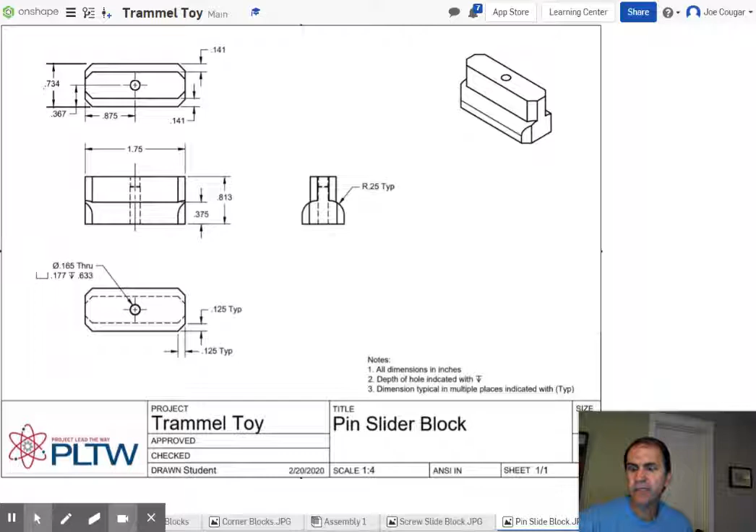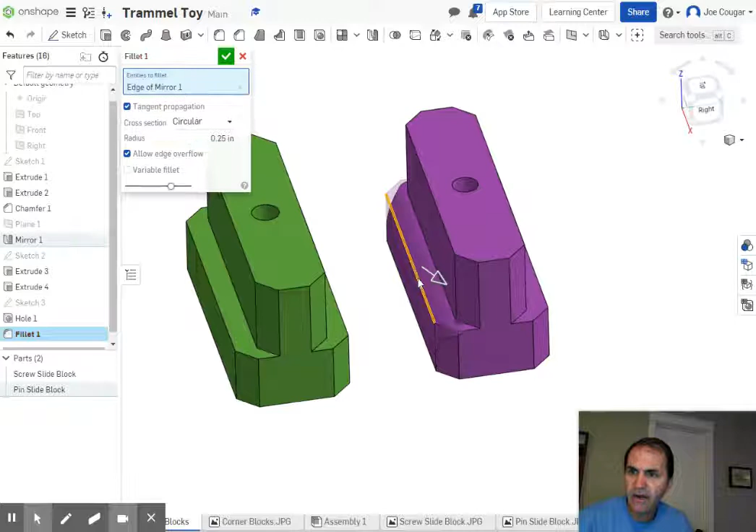So can we please go to your slide blocks and let's fix that right now. You don't need to put a picture of it because I'll trust that you're just going to do that. So we're going to click on fillet, make our fillet 0.25, and we're just going to click on this edge. And to be careful, it's not a surface, it's that edge right there.

And the same thing on the other side, that edge right there. Done. All right, and we're done. We've got it good to go. So, oops, but we fixed it pretty quick. And now we're ready to move on with the corner blocks. So the corner blocks are going to be these four pieces right here. The slide blocks slide through them, and then we will deal with these pins and this little handle and all that stuff later on. All right, so let's get started.

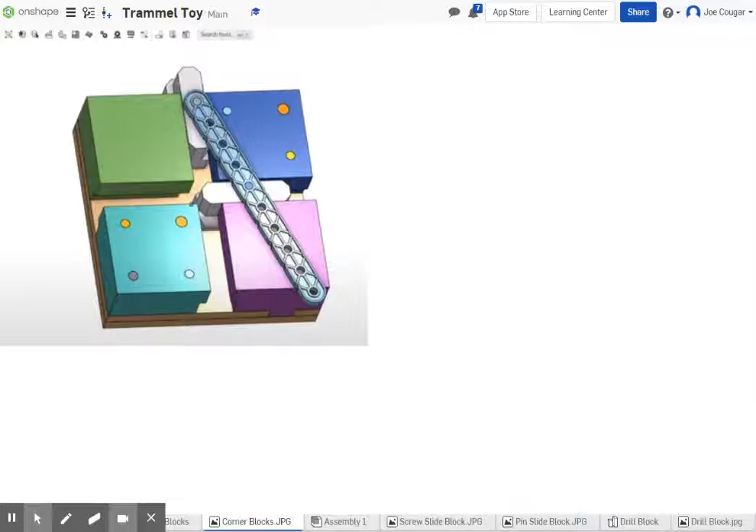We need to begin by creating a new part studio. So let's do that. Create part studio. And where it's named, let's rename that tab and call it corner blocks. And while we're at it, I never named the first one, that is the base plate. Let's go to that one and rename it as base. I think that would be good enough.

I try and keep short names to kind of keep these things where I can see them. So let's go ahead and get started with this. Now, this is going to be a little tricky because rather than draw all sorts of crazy stuff all over again, remember, I want you to do this in the laziest possible way, right? Bill Gates said at one point, when I want to get something done fast, I find the laziest person I can that has those skills, and they'll find the easiest way to do it. So we're going to be lazy.

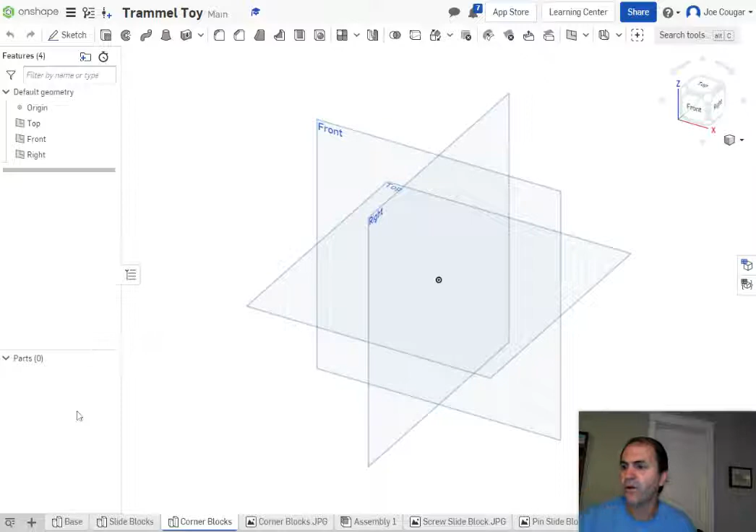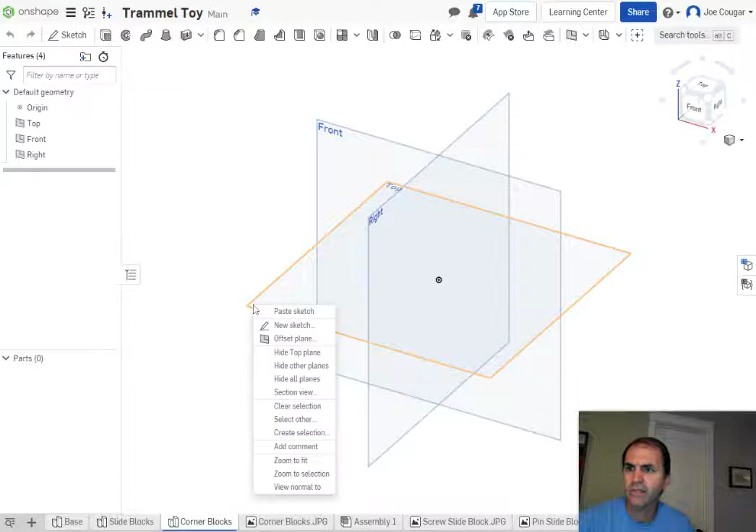So go back to your base, and we're going to go back to sketch 1. That's where we did all those holes and all that sort of stuff. Right click, we're going to copy that sketch. Okay, now we're going to go back into our corner blocks that we just started. We're going to right click on the top view, make a new sketch. I like to turn off the planes by hitting P, and of course we're going to set to view normal. And now we're going to right click and paste sketch entities. Boom, okay, there we go.

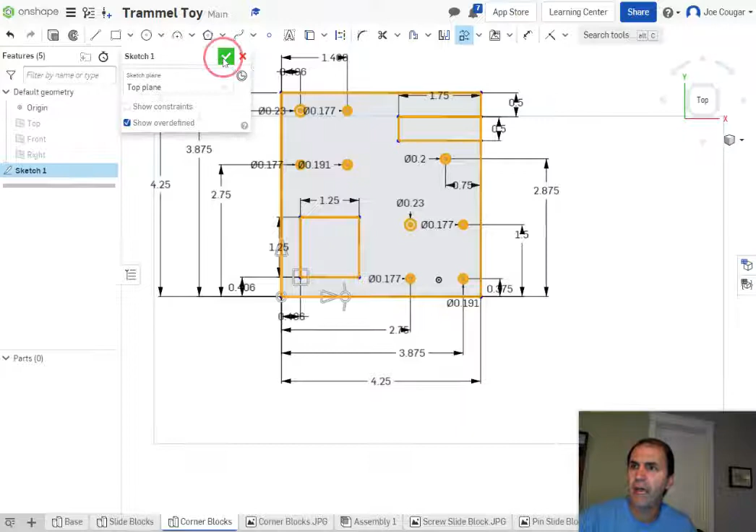All right, now we've got all that stuff that we can use, and we're going to say okay. Now, this is not, the origin point is here, which is a little weird, but that's okay. In fact, I'm going to just turn that off for now. Now, I'm going to go ahead and click on the top view to get this close to me.

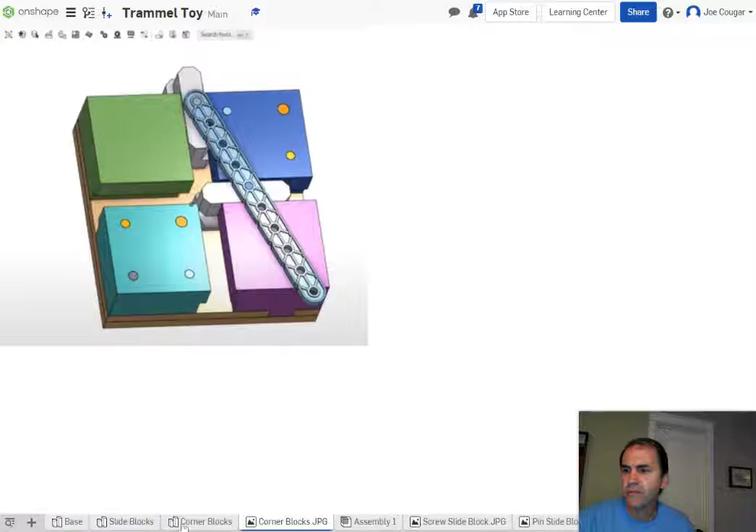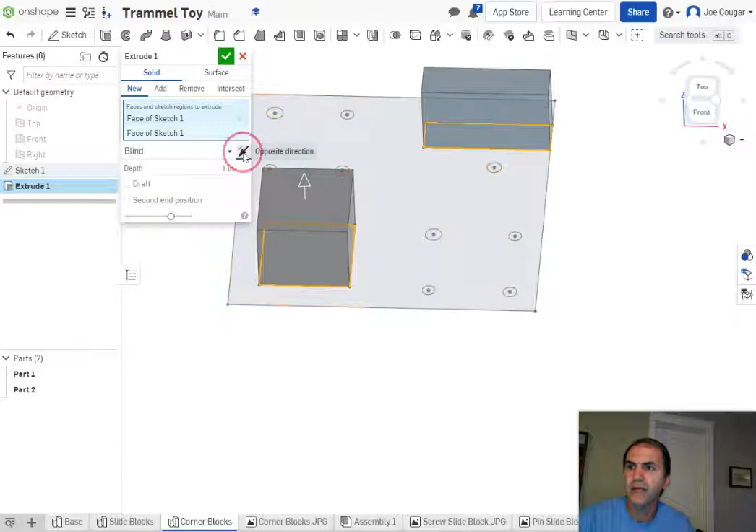Now, we're going to make the undersides, which are down here, these little notches down here. So we're going to start by building up from that, and we need to get some measurements. So here we go. Now, first things first is I am going to extrude these two shapes. They're going to have a part that sticks down into that base, into those slots for 1/4 inch. So we're going to extrude that one and that one, but I'm going to go the opposite direction. Okay, now it's going to make two parts, and that's okay. But we're going to go 1/4 inch, 0.25.

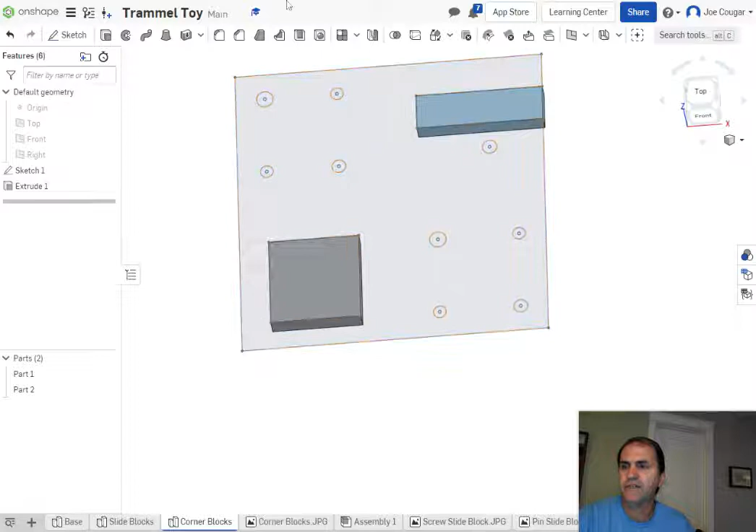Good, so we've got those. Now, sketch got consumed because the program does that for you. It assumes you don't want to use it anymore, but I do. So let's turn back on sketch 1. Okay, all right, so cool. So now we are going to start with a new sketch on this surface. So let's go right here on this and new sketch.

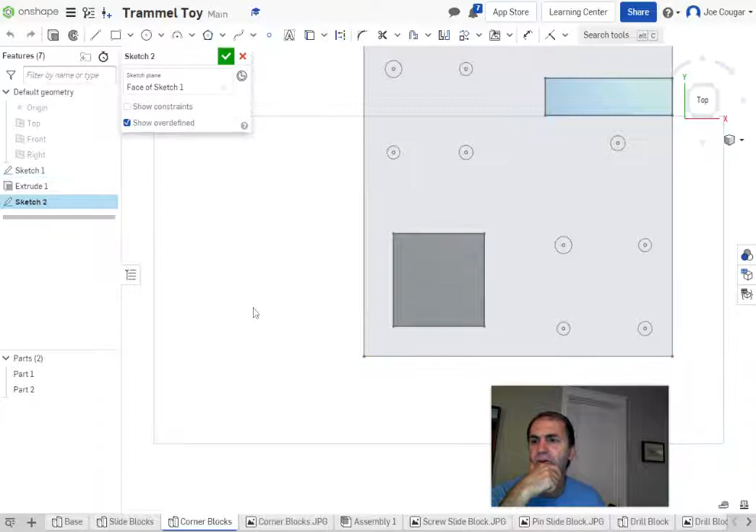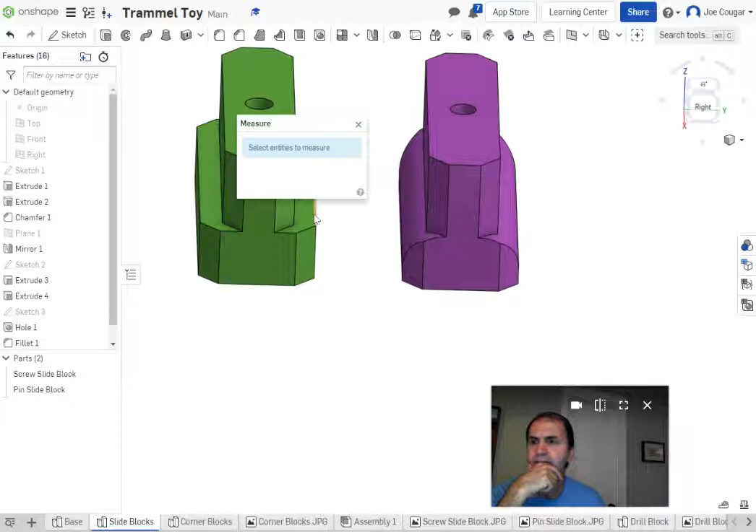Okay, and for normal. Now, we have to make, this whole thing is 4.25 across. So believe, let's measure that to make sure. Measure this line right here, 4.25. All right, so we're going to do some math here and figure out on the slide blocks, the part that fits into there and is going to be from here to here, right? So let's measure that from here to here across. And that distance is 0.734. All right.

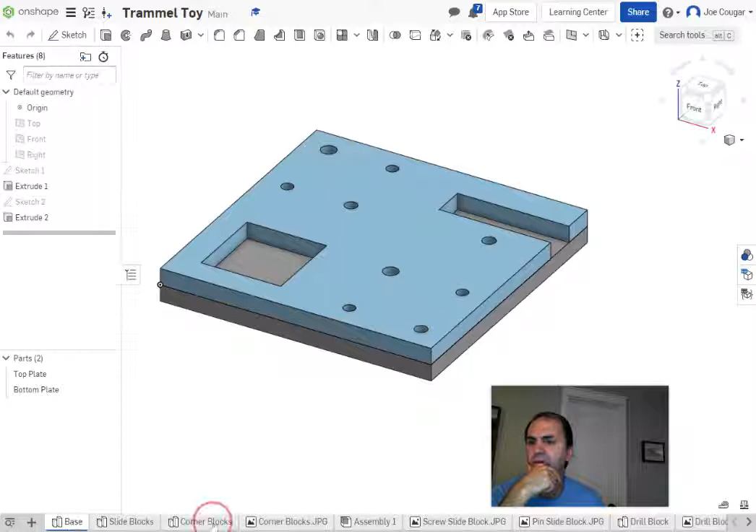So let's go back to our corner blocks. I'm going to draw a rectangle, but I want it to be a little bit smaller than that, to have some clearance. So I am going to make that rectangle that's going to be extruded actually smaller than I need, so that slide block has some space.

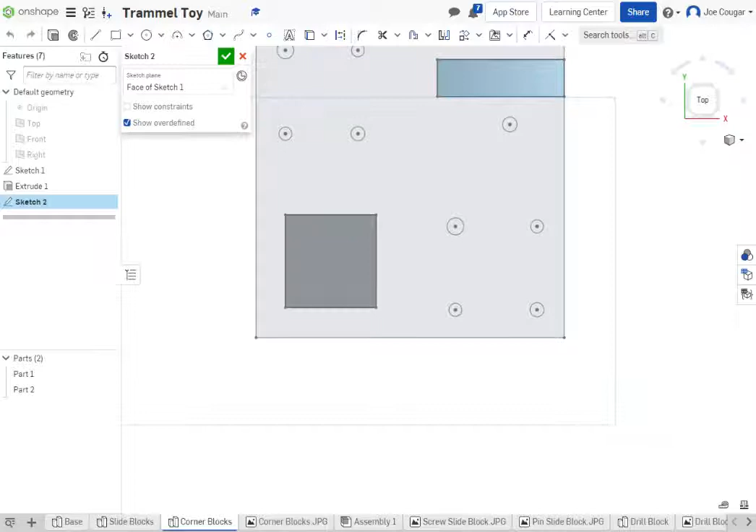So in order to give some clearance, we are going to draw a rectangle down here from this corner upward. Now I'm just going to click. I'm not going to enter any values yet. Actually, I am going to enter values, but I could go and dimension that if I need to.

So this first dimension, whoops, I accidentally clicked off it. So I'll go dimension here from this corner to this corner. That dimension, the whole thing was 4.25. But I'm going to subtract out 3/4 of an inch because that little slide block was almost 3/4 of an inch, so we're going to do a little more than that to leave some clearance. So we're going to do minus 0.75.

But we're going to take that whole thing. You have to do order of operations, folks, it matters. And we're going to divide it by 2. Enter. Okay, and it ends up being 1.75.

So it's going to be square, so we'll dimension on the other side to that 1.75.

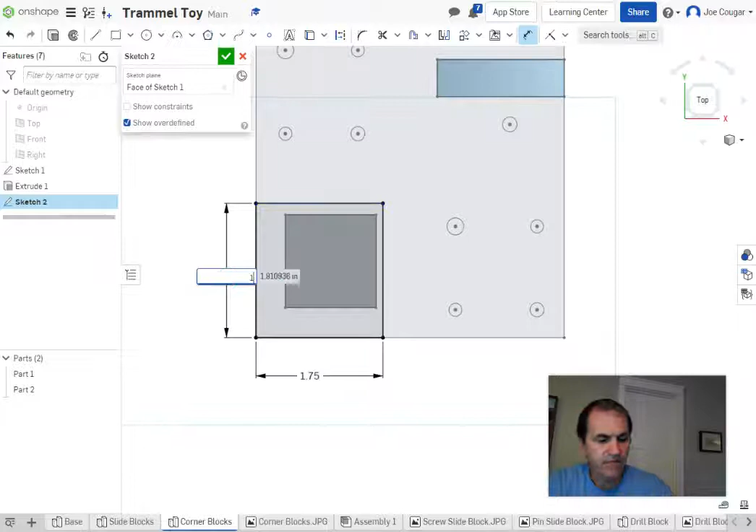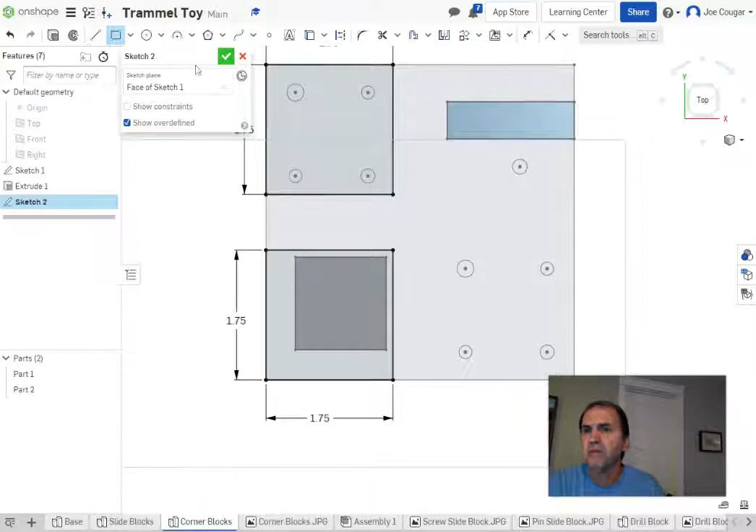And then let's make all other rectangles. I'm going to show you a little trick here. So I'm going to do this 1.75, not 175, that would not be good. 1.75. Now, little trick, you could do that same exact thing again, or you can draw your next two rectangles like this.

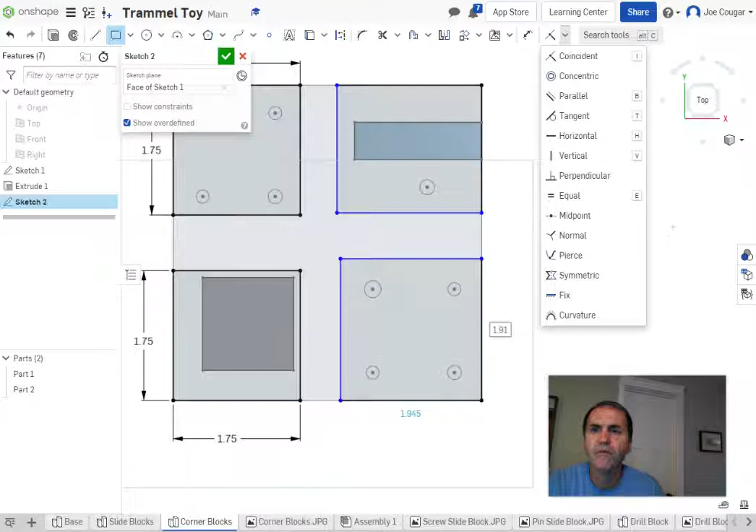Well, we'd still have to dimension. I was going to say we can do a linear... where's my linear? Oh, I'm thinking of another program. Well, we could do horizontal constraint between this and that, and then it will make it the right size. I'm just going to dimension just to make it easier on myself.

So let's do this as 1.75. Now it might not let me do the other one because I have it restricted. 1.75, enter. Yeah, see how it's gray? That means that it's a driven dimension. I've already dimensioned over here, so I'm just going to delete this.

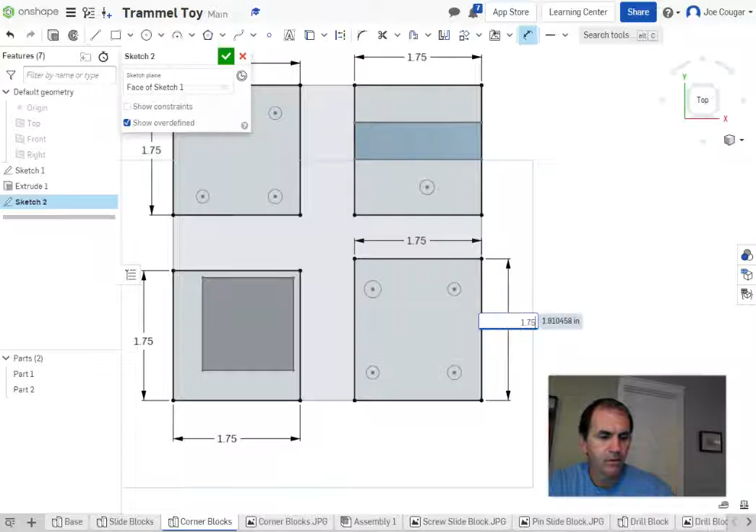If you didn't do it this way, you have to make sure it's all black, right? So, 1.75. And finally this way. All right, we are good to go with our 1.75 rectangles.

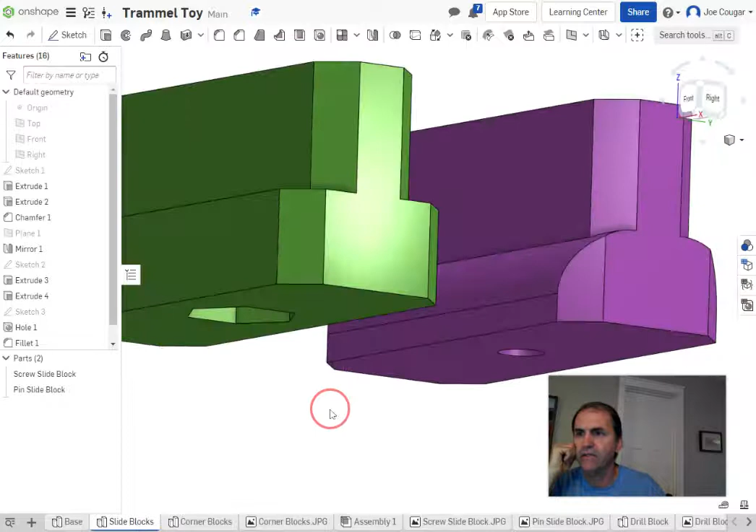Now, we are going to extrude those upward, but again, we want a little bit of clearance. So let's go back, I'm going to go ahead and finish this sketch. And we're going to go back to looking at our slide blocks, and let's see what this distance is going up. Okay, so we're going to measure from here to up here and see what that is.

0.355. So we're going to make our distance 0.4 and give it a little bit of clearance to move around in. If we were 3D printing these, we would have to have some clearance to make sure that there's adjustability for the tolerance of those materials.

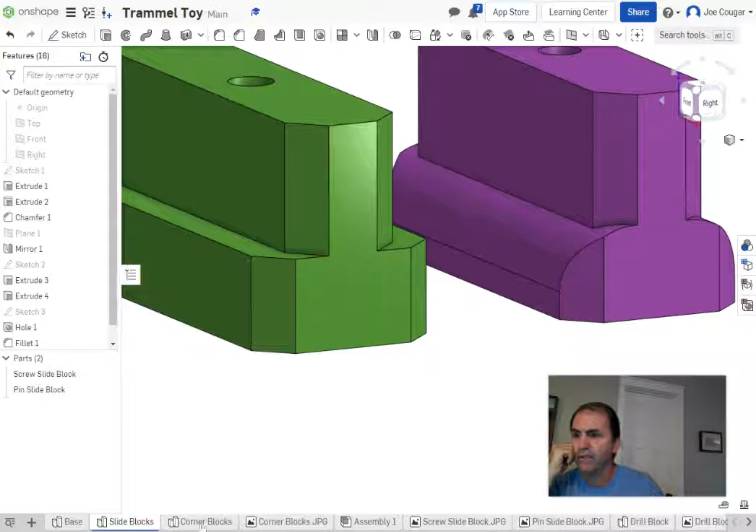All right, so let's go back up here, and we are going to extrude. Now I'm going to show you a little trick. If you try and extrude and come in here, there's all this different stuff, but we can extrude a sketch.

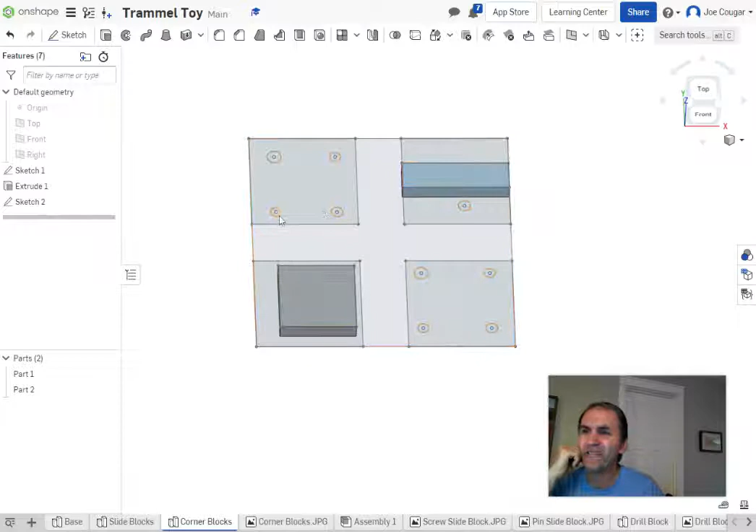Now, I messed up, so which means you messed up. So let's go back, and I kind of forgot in sketch 2, we got to deal with these little holes because those holes are going to go through there. So let's go edit this sketch that has those rectangles we just made.

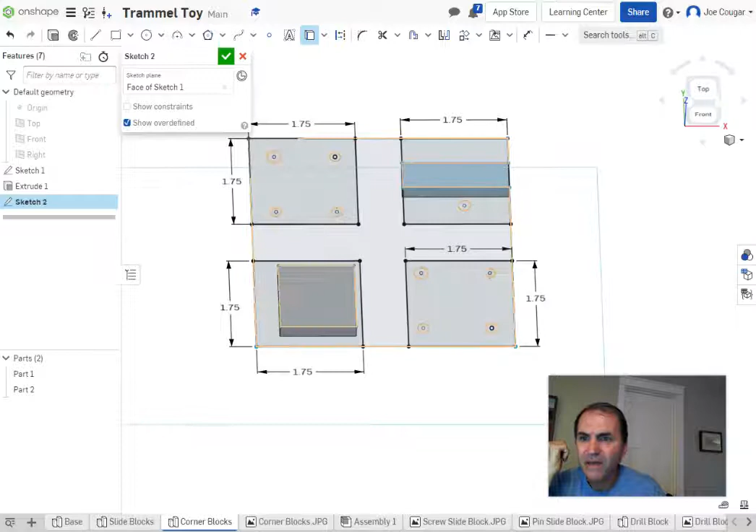And we need to use these circles that are on here. That one, that one, that one, that one, that one, that one, that one, and oops, I didn't get the circle, I got the center point. Make sure you get the circle and its center point, not just the center point. So see that one up there that's gray? Yeah, make sure you look at that.

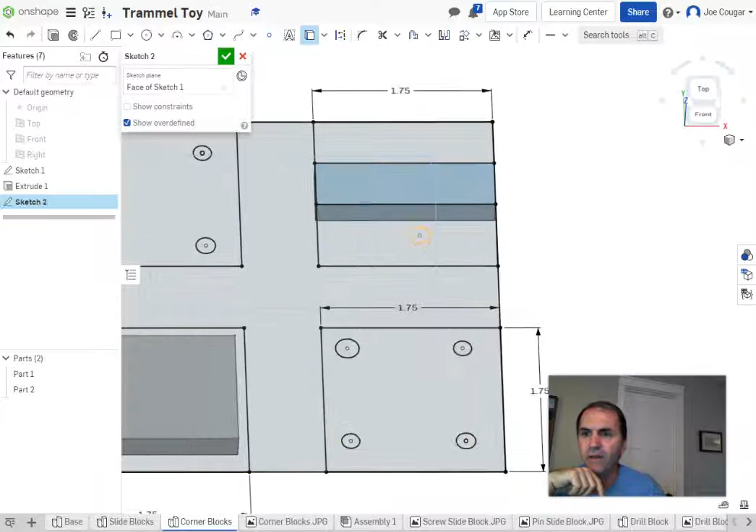There we go, to get the circle. Okay, now on this one, this little one that's by itself, if you already clicked on the circle, it's no big deal. But I just want the center point on that one. Click. Now here's why. I am going to make a new circle on here that's slightly smaller than that one.

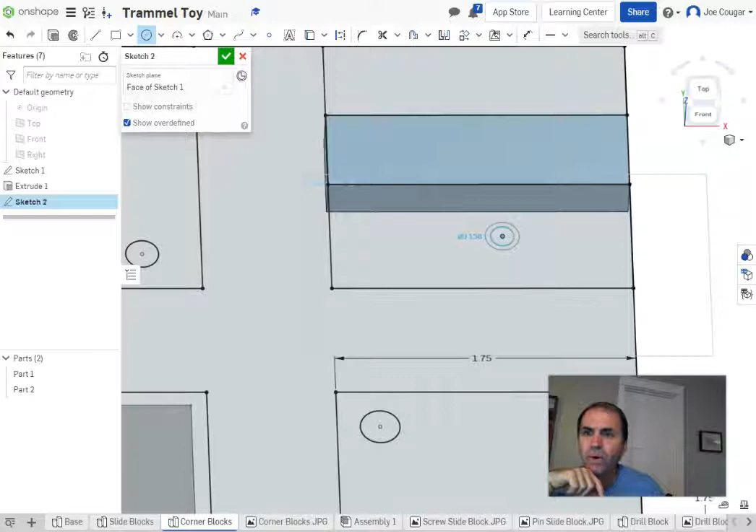Circle. I'm kind of going to guess at the dimension. Let's make it a 0.125. That's 1/8 of an inch. Click. 0.125 circle. Now, if you already have this one as black, it's fine, but we're going to have to just be careful when we extrude that as to what we're choosing to extrude. All right, so we're good with that.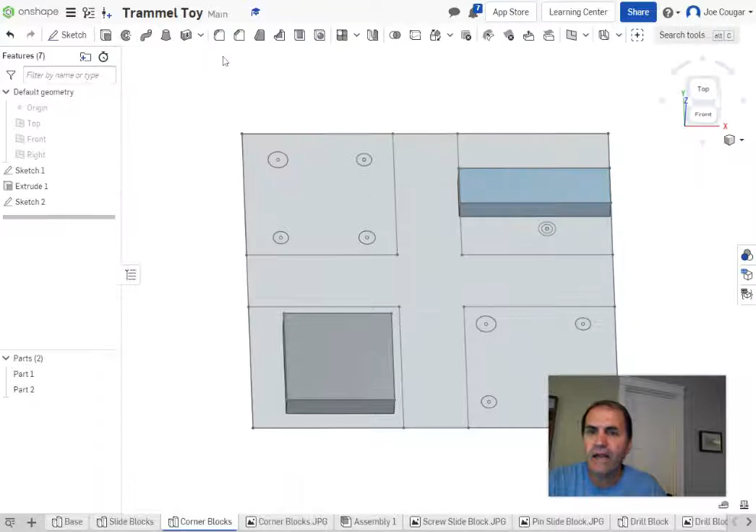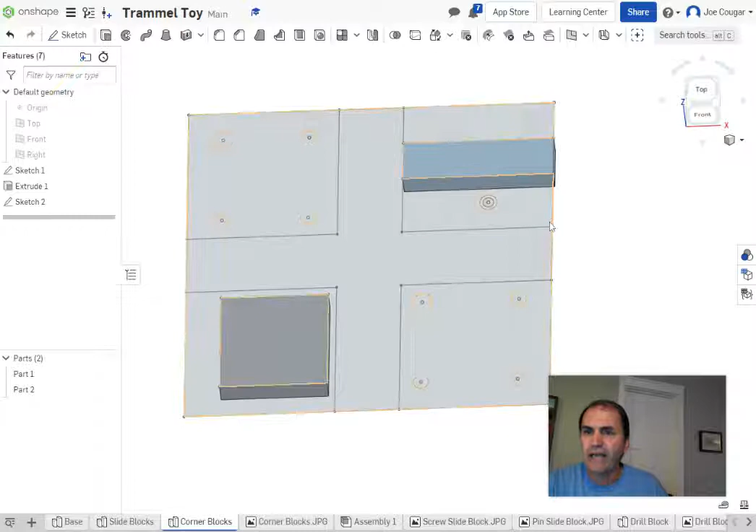All right, now we are going to extrude. And what we're going to do is, instead of trying to pick on things, just click Sketch 2. Okay, and it should extrude. Well, no, it's not working. It's wanting to grab everything. All right. Thought I was going to be tricky. Okay, so we're going to have to be careful with what we're doing here.

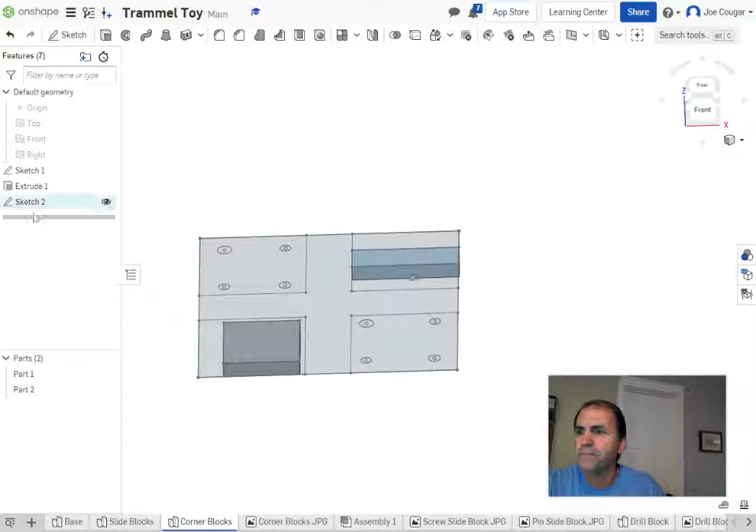So we're going to extrude. I'm going to choose that area, this area, and oh boy, it's not wanting to do that. I might have to do several extrudes. Let's try and see if I can. Maybe, oh, I know what's happening. I need to turn off Sketch 1. All right, now I should be able to do it. All right, extrude. And let's go to choose Sketch 2. No, it still wants to choose those things inside.

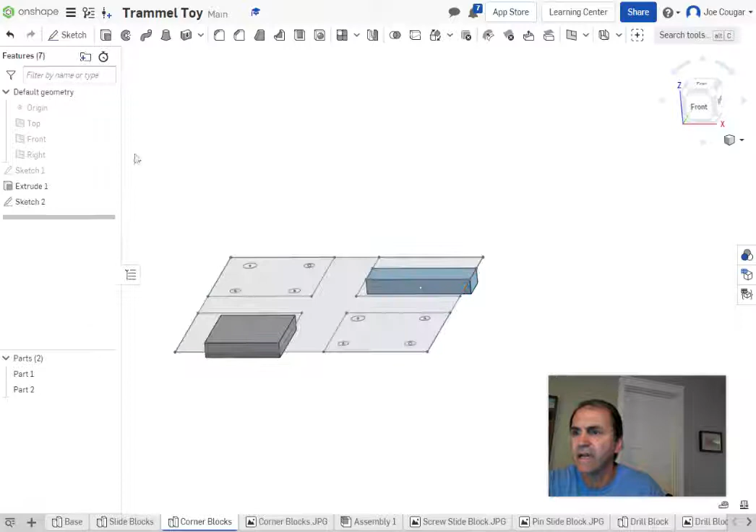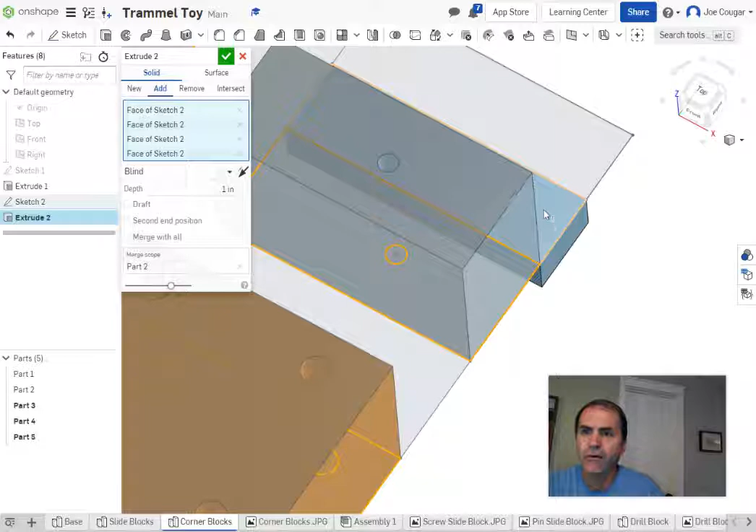Let's try that again. I'm going to choose this area. Again, I might have to do more than one. This area and that area. This area. And then be careful with this one. If you already did this, we're going to choose around that little circle that I made. This. If you have a bigger circle, that's okay. Let's not even worry about that for right now. And we're going to go to a distance of 0.4.

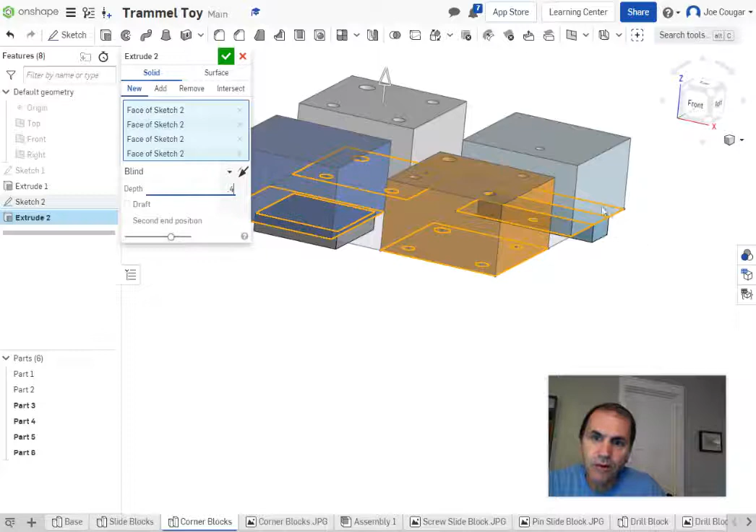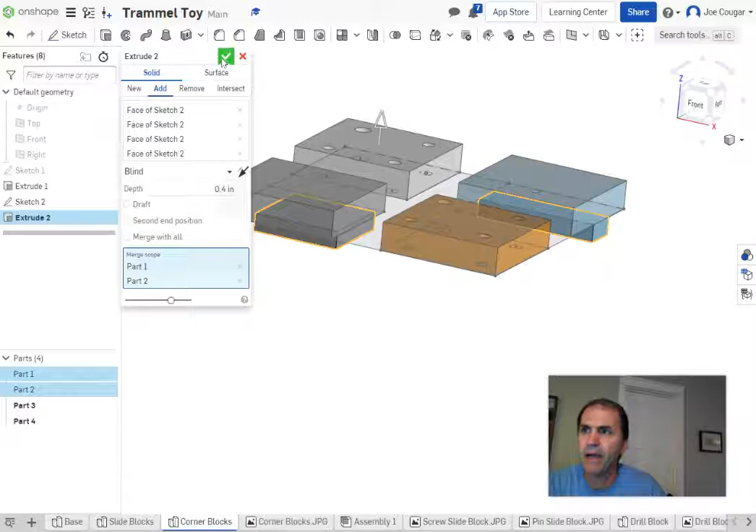Now, it's going to make separate parts because none of these are connected to each other. But we want this piece down here and this piece to be joined together in this piece. So we are going to choose Add. Now, the merge scope is going to be with these two parts, and that should work. Okay. If it doesn't work for you, just watch again. I'm going to go through this one more time, or you can go back and rewind the video to watch that again and just be careful with what's going on.

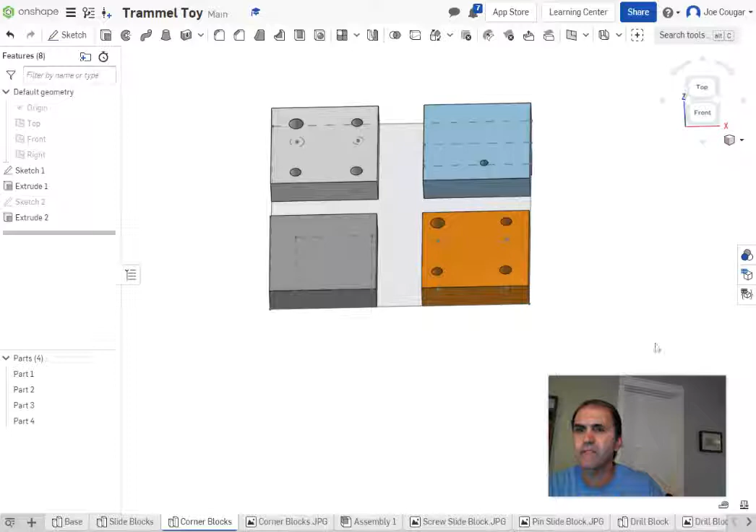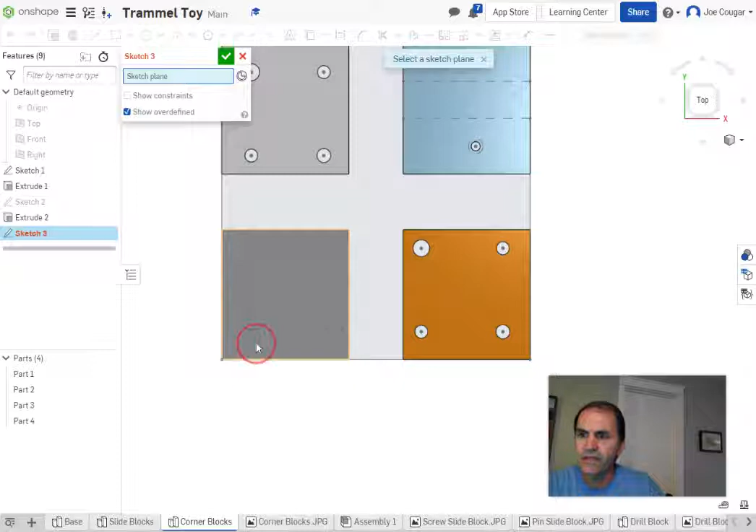All right, cool. So we have our 4 corner block parts for the bottom. Now I'm going to go back in, turn on Sketch 1, because I need to be able to see that. I'll look down at the top, and now I'm going to build up this little corner piece, this little part that sticks out, that kind of holds the whole thing down. So we're going to build that one next. So we're going to sketch on this surface, will be just fine, and we're going to make those 4 rectangles kind of like what we made before.

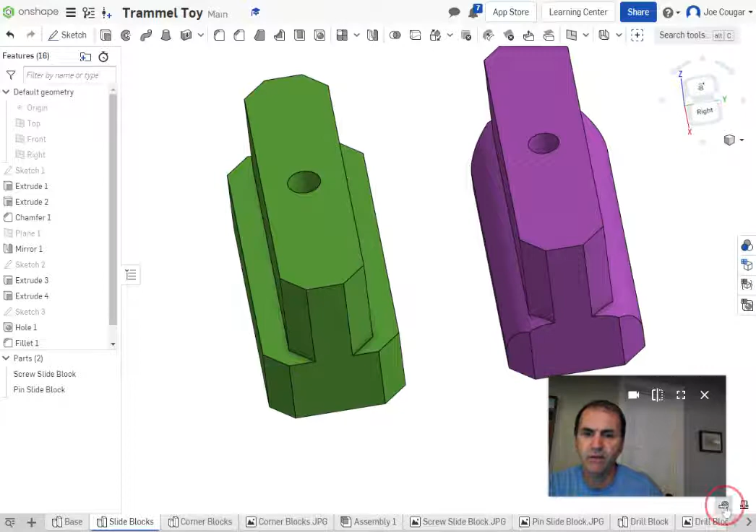So let's click down here, go up here. We're going to do another little bit of measuring to see how far in we want to go. So on the slide blocks, we want to know what is the distance across here. And again, we're going to subtract more than that out to give a little bit of clearance. So let's measure from there to there is 0.452. So if we go 0.5, we'll give that a little bit of clearance. So let's do that. All right.

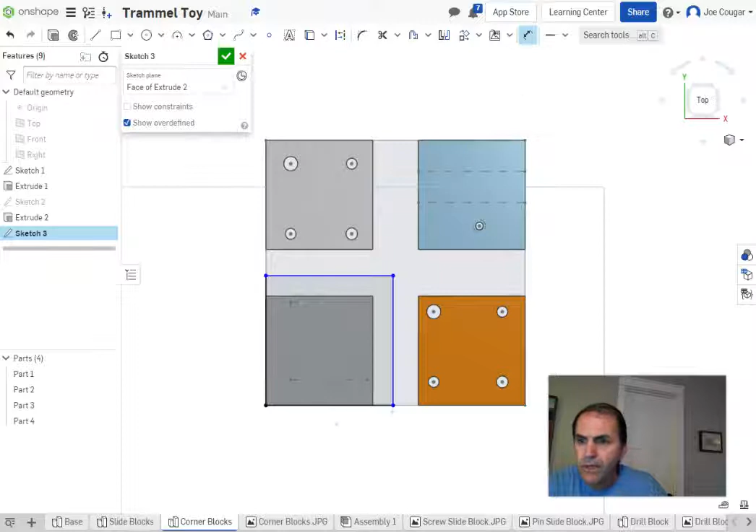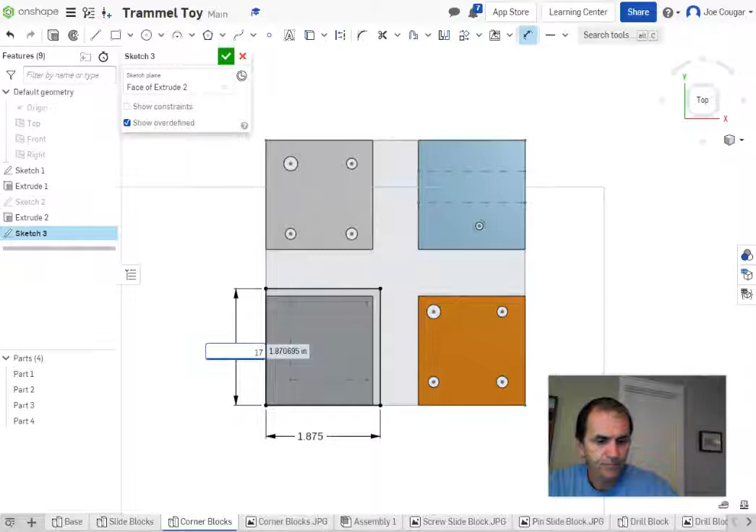So this time, my dimension from here to here is going to be (4.25 minus 0.5) divided by 2. Okay, good. And it ends up being 1.875, which is 1 7/8. So let's go ahead and do the other one. Whoops, I made 0.18. Let's do 1.875. That's better. All right, and make your 4 other rectangles starting from the outside corners with those same dimensions. And once you've got those, we're ready to go with the next thing.

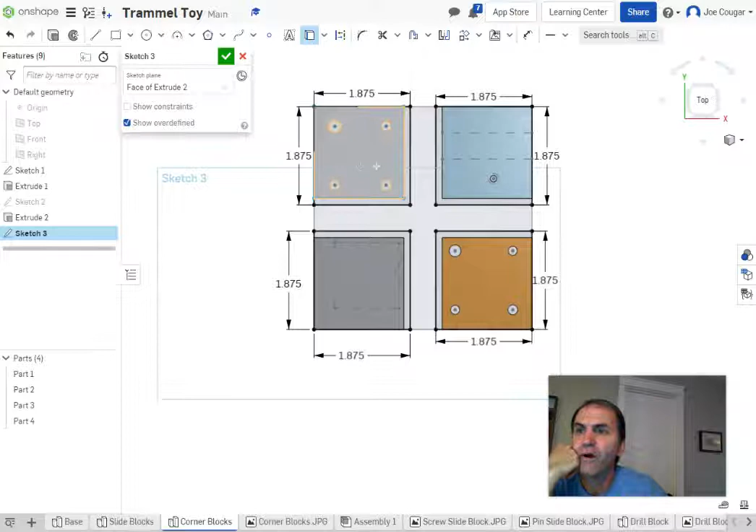Now, these holes on just these two, not this one, go through the whole thing. This one will not be projected, but we need to use project again, and we're going to click on just these circles. Now, I was going to click there, but that'll give me these edges that I don't want. So I'm going to click on these circles. Again, make sure you're clicking on the circle and not just the center point. And then the same thing down here.

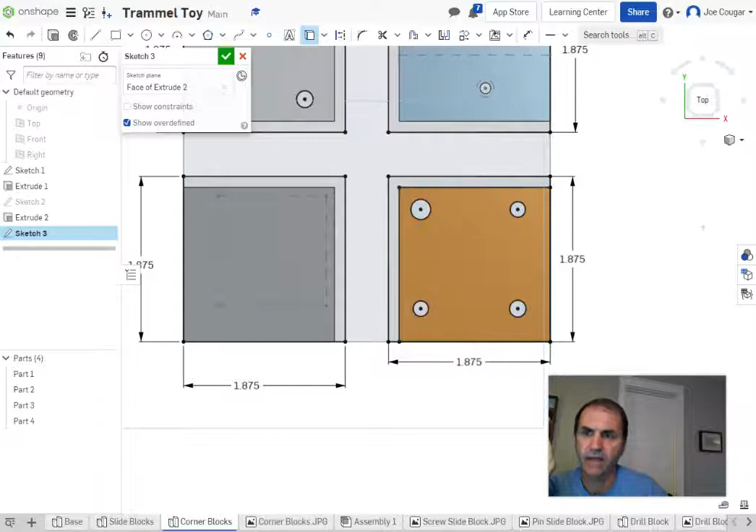I think down here I'll click on this just to show you what will happen if you accidentally click on that and get the whole thing. All right, now we're ready to finish our sketch and extrude. So we're going to extrude. Let's try to see what happens when I choose sketch 3. It should work. All right, that looks pretty good.

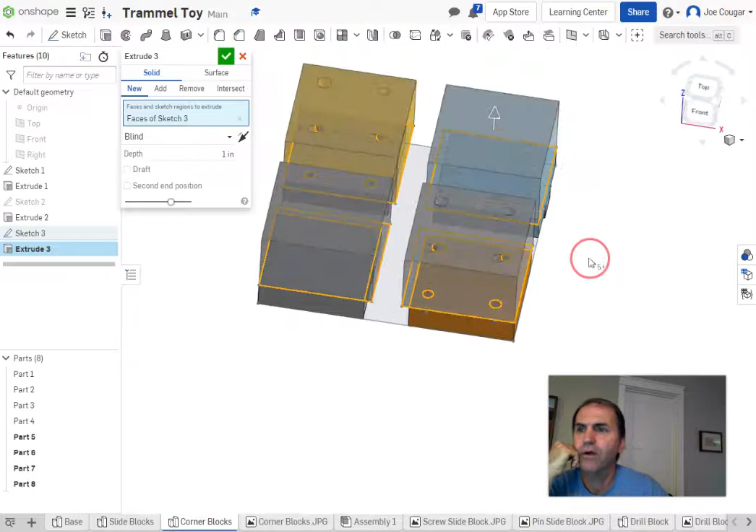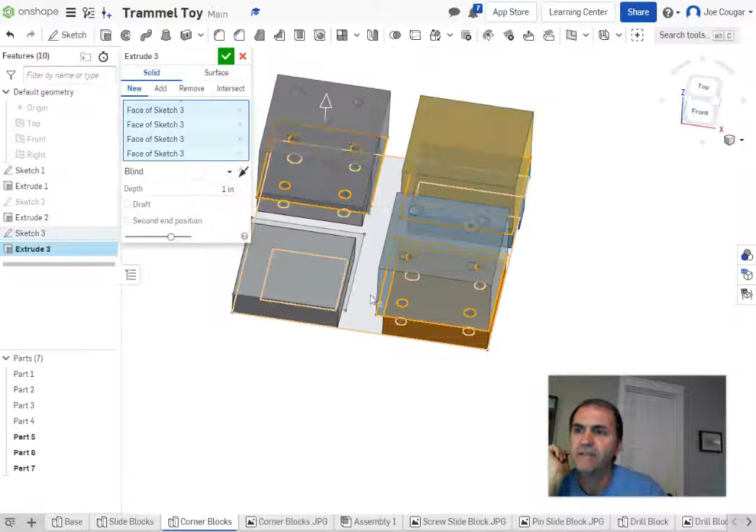If that works for you, great. If it didn't work for you, then we will have to choose extrude and go through and click on these things. So notice that on this one where I accidentally clicked on that, it's not getting all of it. So I have to choose both things. So that's what I wanted to illustrate before. Oh, this one's doing that too. Look, it's hitting that one. So you have to be careful and make sure you're getting everything.

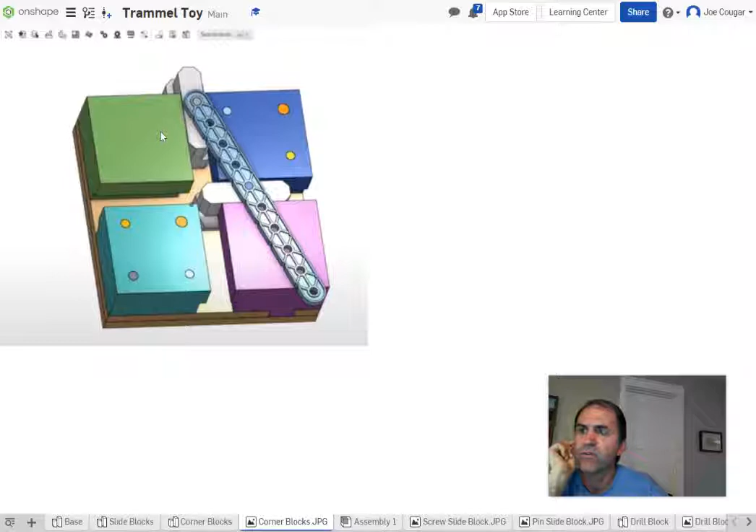Okay. And we are going to go to a certain height. Now, before I go to what that height is, I need to determine how far we go, because these little corner blocks actually stick up a little bit above the surface. So this time we have to go less than what the overall height is. Let's find out what the overall height of these things is. So we're going to measure from this surface to that surface, which is 0.844.

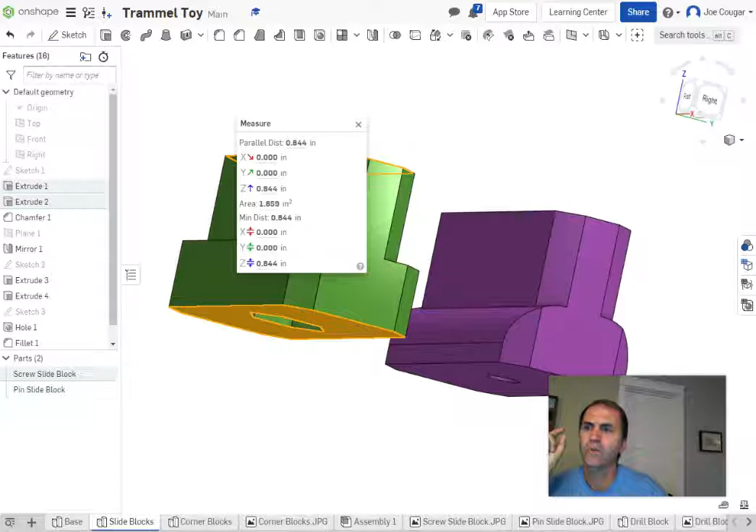So we will go down. The first one was 0.4. The second one will be, I don't know, 0.3. I've got it written down what I decided I wanted to do. Let's go 0.45, I think will work. Yeah. Okay. So we will now extrude that to a distance of 0.45. And we are looking pretty good.

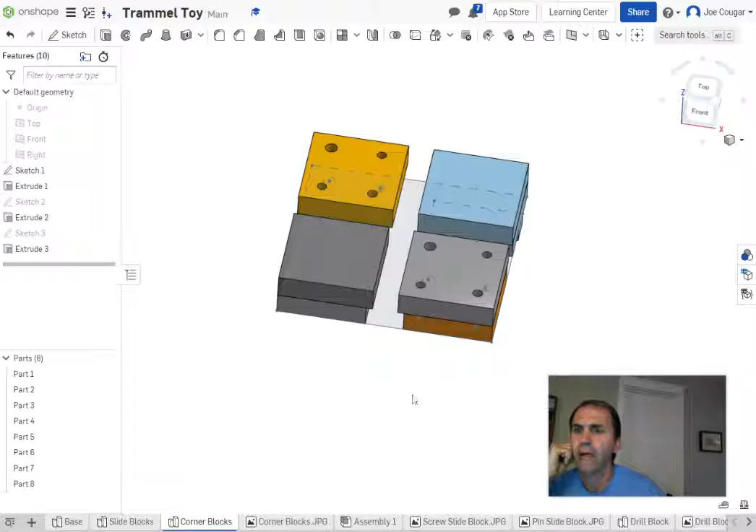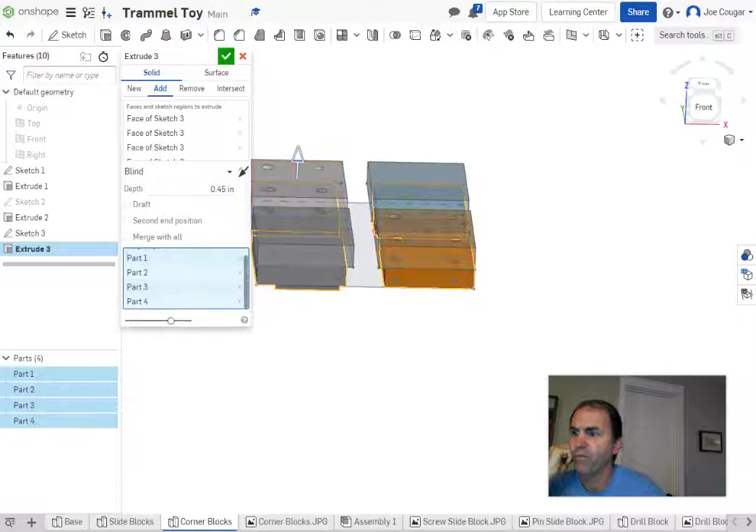All right, now the one thing is, notice it's making new parts, which is not what I wanted to have happen. I wanted those to join. I should have only 4 parts. So let's go back to the extrude that I just made. You might have already hit add. My merge scope is going to be all of these 4 parts. Okay, so I'm clicking all of them. It will merge anything that's touching anything. And we are good to go. We've got our 4 parts.

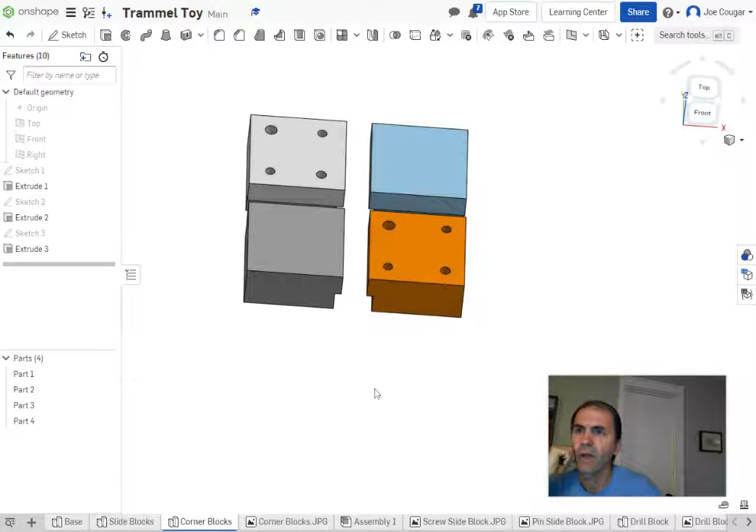I'm going to go turn off sketch 1 that's been on. All right, looks good. Now you can make them any colors you want. Last thing to do, well, two more things to do. One is, if you'll recall, the thing that I forgot at the beginning of this video was this rounded part. So the corner blocks are actually going to have a fillet in them also.

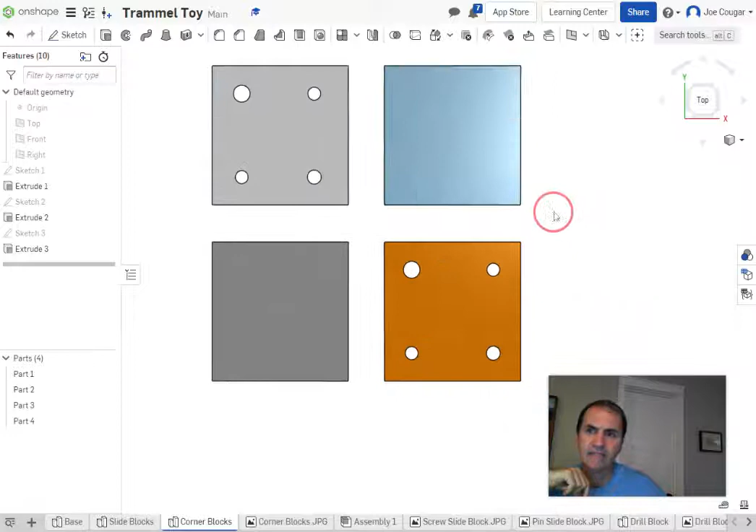So we're going to orient it when we're looking at the top, this is the way we're going to look at it. So lower left, upper right, lower right. And these are the edges that are going to get filleted. It's going to go through here. So we're going to do these four edges. Fillet, we're again going to do 0.25. There's already a clearance built in, so it's fine that it's that same radius.

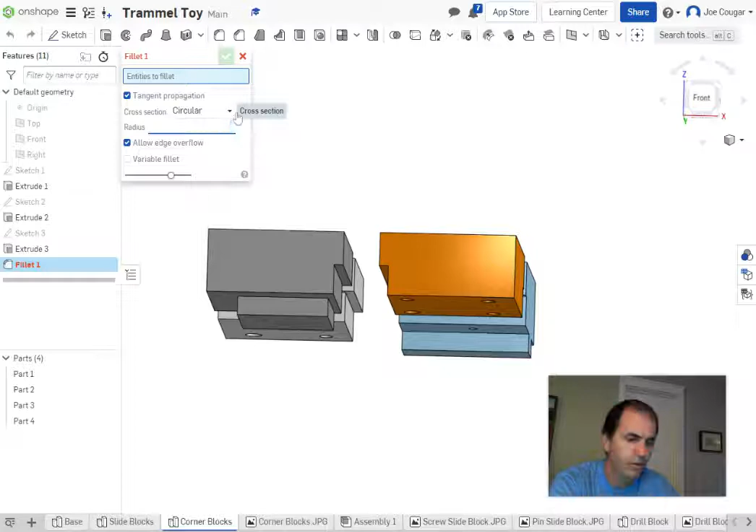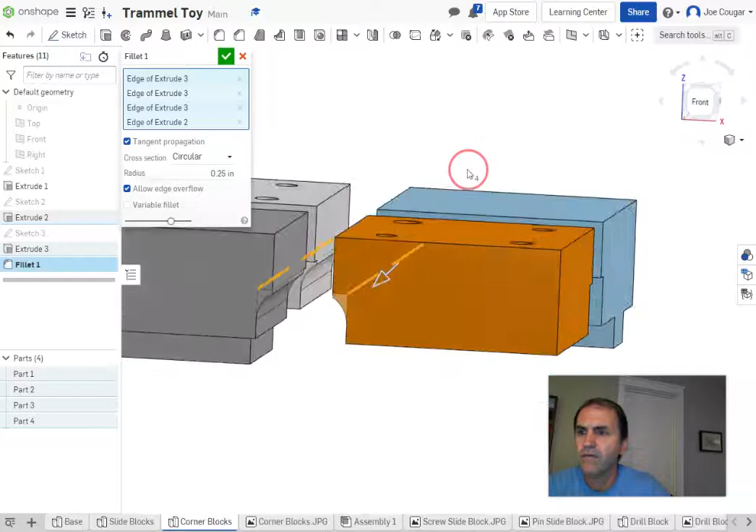And we're going to choose those four. It's a little tricky to get in there and see them, inside edges, so that when we're looking through here, there is a little slot going through, those rounded edges going through. Okay, cool, we're looking good.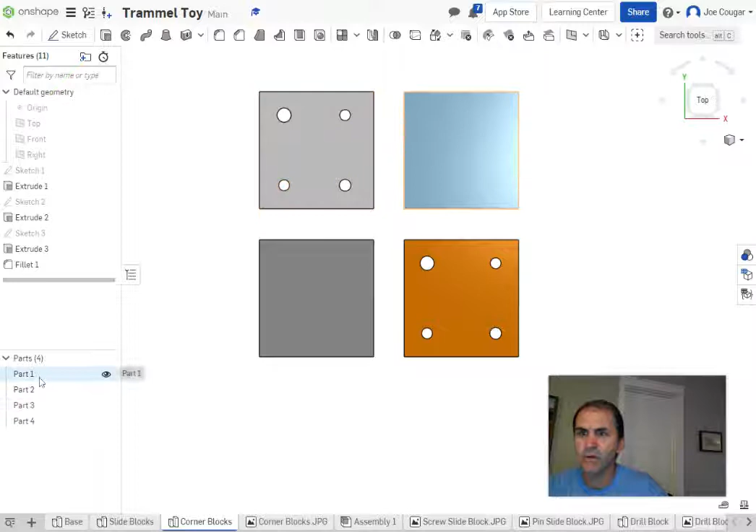All right, now last thing is we're going to look at this and figure out which part is which part, and we're going to name them. So if I hover over here, you can see that upper right one's glowing. So we're going to rename that as upper right. Let's just put RT. This next one, now yours might actually be in a different order, but my next one is lower left. I think I'll just put up here instead of RT. I'll rename that and just put R for right.

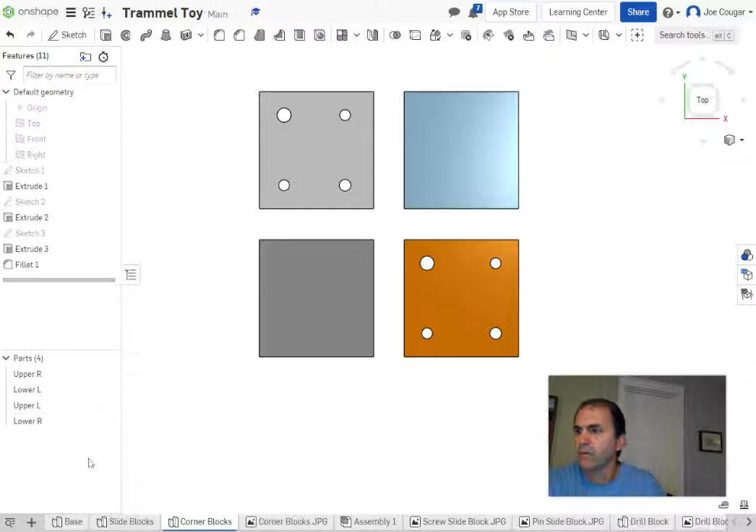This one is upper left. And finally, this one is lower right. Better be lower right. Yep. All right, so let's get this to an orientation looking something like that. Again, you can assign different colors to it if you want. And take a picture of that and turn that in.